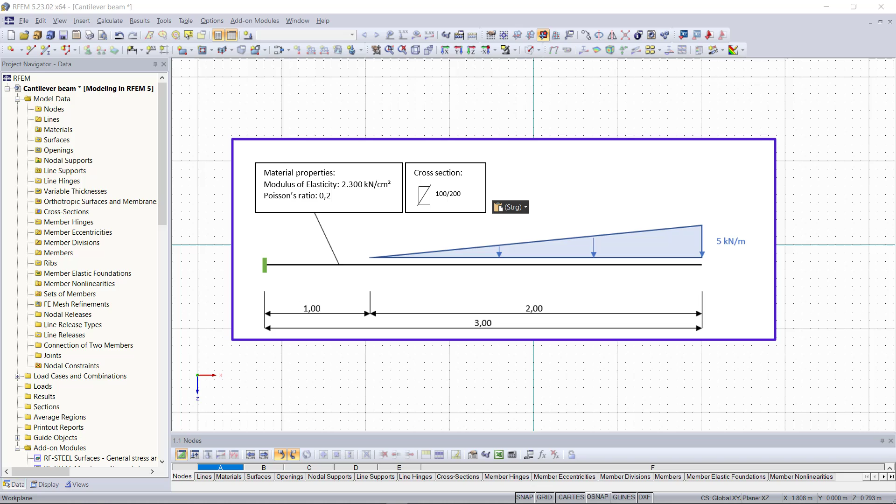Hi guys, and welcome back to our second part of modeling in RFEM. As previously announced in the first tutorial, we are going to create this cantilever beam, this time using the dialog options in RFEM for modeling.

To begin with, we can access all dialogues in the project navigator on the left side of the screen by right-clicking on the respective tabs or folders. Or we can access these dialogues using the insert menu up here as well. For instance, if we choose model data and select materials, you can see the option dialog box here. Within this tutorial, I am going to use mostly the project navigator for opening up these dialog boxes.

And again, we will start with the nodes of our beam element. For that, we go up here on the nodes folder, and with the right click, we choose the option new node. Then this new dialog appears, and just like in the first tutorial where we did use the tables for creating the nodes, we are going to enter the coordinates of our nodes depending on a reference node. This will be the origin, and we are going to place the first node here, so the coordinates of this node will be 0 and 0.

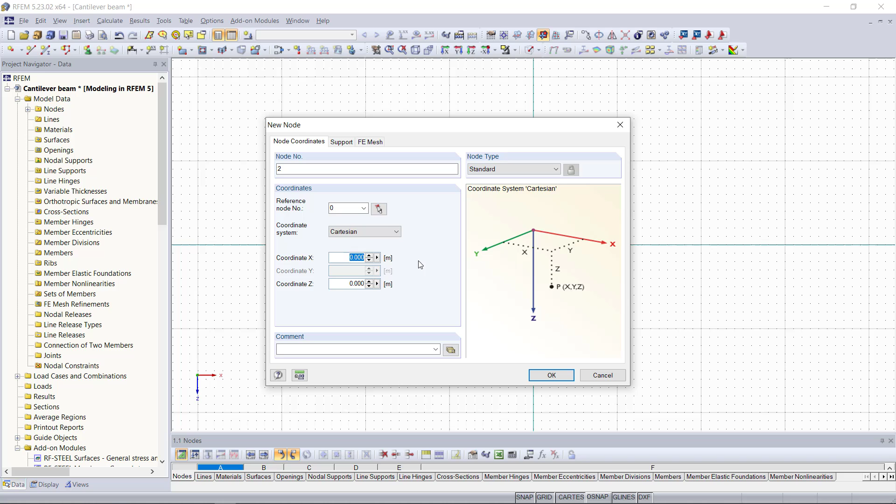Then we click OK, and we do exactly the same for the second node. Right click on the Nodes tab and choose New Node. The coordinates for the second node, we enter here 3, which defines the endpoint or the length of the beam. Again, we hit OK, and then we can see that the nodes are set in the graphical area.

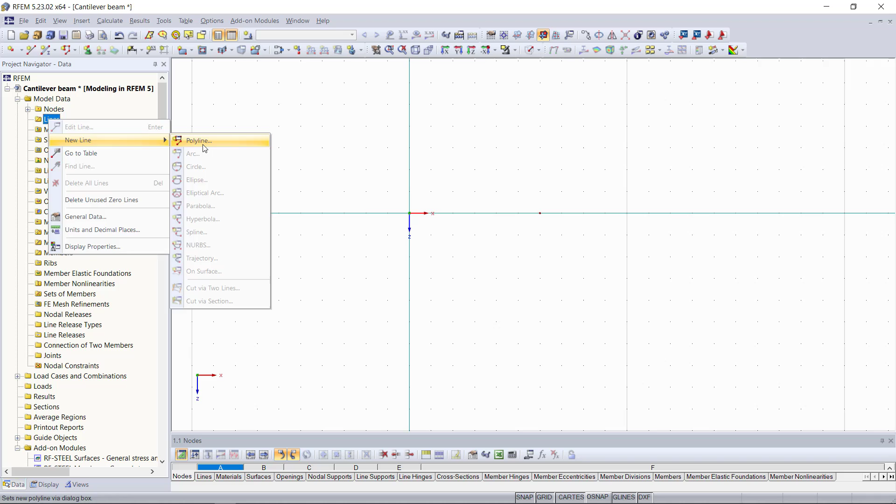So now to connect these nodes with the line in between, same procedure once again. With the right click on the Lines tab in the project navigator, we open the dialog box for a new polyline. At the top up here, we can define the number of the line. Since we just have one line, this will be the first one.

In the section below, we select the nodes to be connected, and we can either type in here 1, 2 for our 2 nodes, or if you have a more complex model and you don't know the numbers of the nodes, there is also the option to select the nodes graphically, if we click here on the cursor button and select the nodes out of the graphical area.

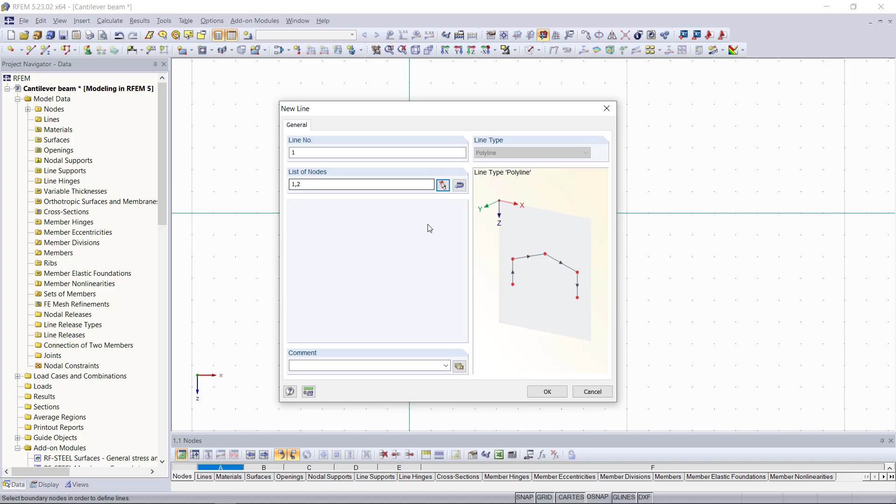Next, we will continue with defining a material. Let's say again, just as an example, we enter here material 1 like in the first tutorial. Then we will enter our characteristic values from that example. Again, you will notice that after entering the modulus of elasticity and a Poisson's ratio, the shear modulus is automatically determined. We can close this by clicking OK.

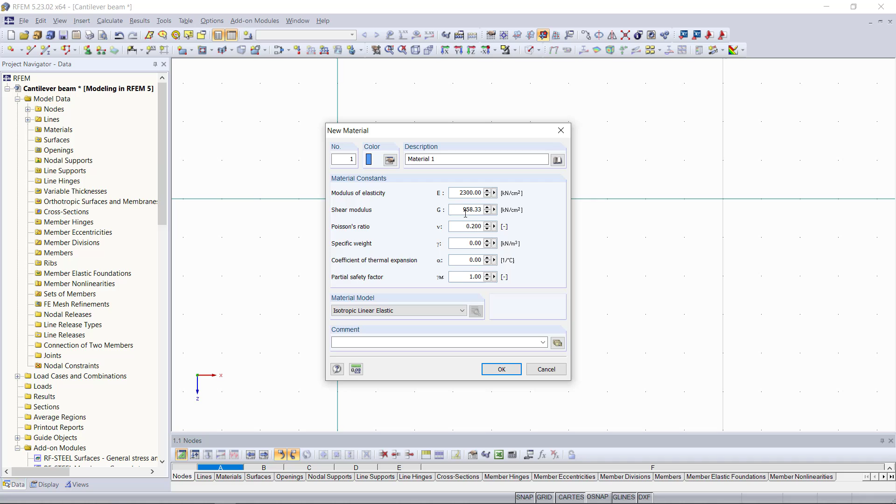Now we are going to set the supports, and once again we can find in the project navigator nodal supports, and with right click we will open the dialog for that. So a cantilever beam is one of the basic types of beam elements, and remember this type is characterized to be a statically determinate system. For that we need 3 support forces or reactions as a minimum.

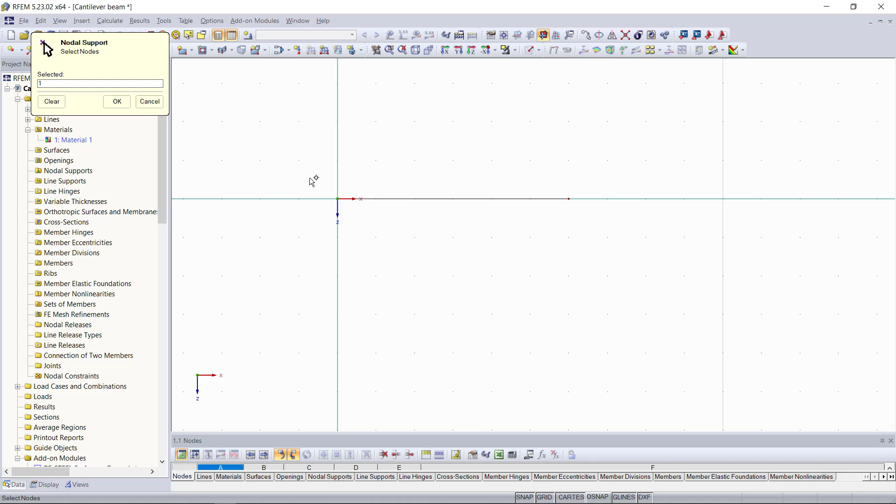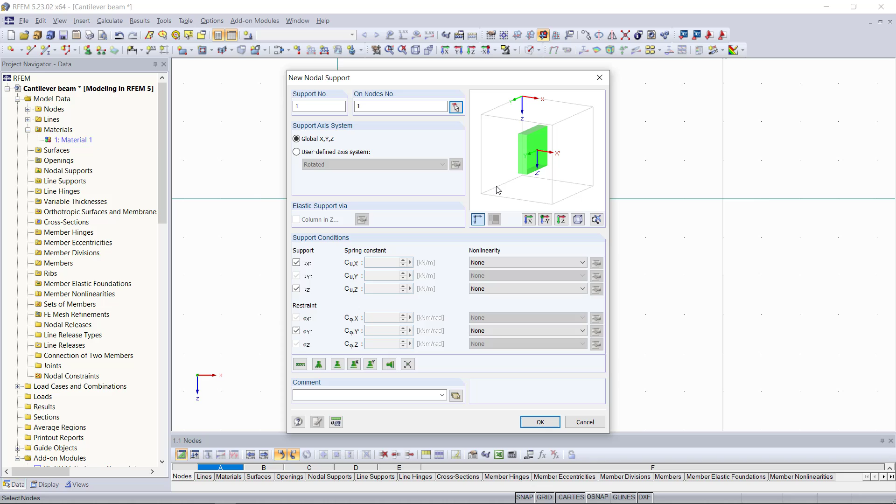Since this beam is supported at only one end, we have only one actual support here, which is going to be our first node, and at that support it has to have all of those reactions. For that, the support conditions here will restrain the beam horizontally and vertically. If we don't have anything else, it'll be allowed to rotate, and we don't want that, so we lock the rotation around the y-axis here. The graphic at the upper right corner gives you a nice visual illustration for that.

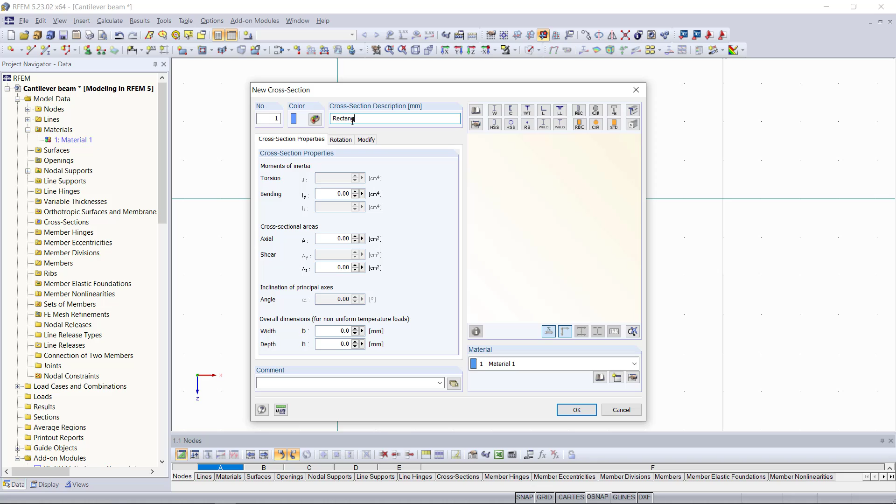Then we can click OK, and next we need a cross section for our beam element. In this dialog, we can either open up the library if we hit this symbol here, or we can just type in the cross section as well. Let's say we enter here rectangle, which will have a width of 100 and a height of 200, same as the one in our first tutorial. We can see below the cross-section properties, and down here we can choose the material for this cross-section, which will be our defined material 1.

Now that our cross-section is defined, you will notice that it's blue here in the project navigator. This is because it doesn't have a member to it yet. To assign it to a member, we can go to the members folder, and right-clicking on members, we select new member. Within this dialog, we can assign up here the member to a line. We can either type in here line 1, or once again we can assign the line graphically.

Next, within this drop-down option here, we can select the member type. For now, we are going to keep that as a beam. And below that, there is the option to rotate the cross-section as well. If we click, for instance, here, we can see this rotation here in the graphic on the right side. Moving on down here, we can assign the cross-section for this member, and we'll keep that for the member start and the end the same.

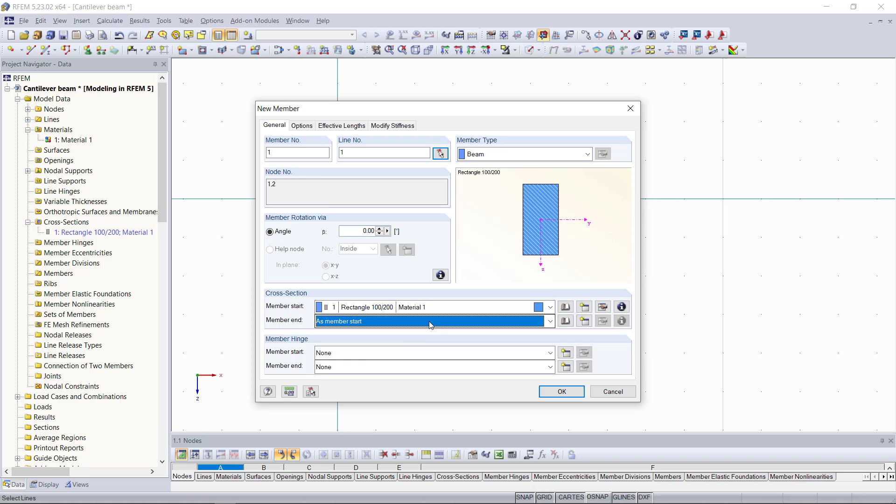We can also add member hinges, but we don't need that for this example. So we click OK, and if we turn off the wireframe model, you can see in the graphical area the cross-section has been rendered.

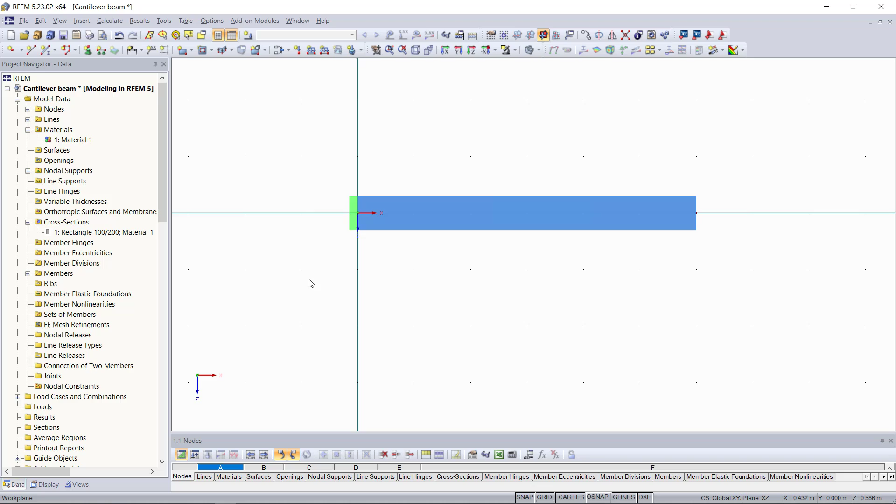Now that we have all model data that we need, we can move on to the load cases and the loads we'd like to apply. Remember, before assigning any loads, we'll have to define a load case. We can do this by going to the load cases and combinations folder in the project navigator. With the right click on the load cases, we choose new load case, and you can see in this dialog the program has already created our first load case.

Within this tutorial, we are going to have only one load case, so we can keep that and choose all loads here. Then we can deactivate self-weight because we don't want that to be taken into account for the results later.

Next, we will continue with the member load, and if we expand the loads tab in the project navigator, you will find for every load case that you have created a new folder. Since we just have one load case, we will expand this one here, and you can see here the options for different loads like nodal loads or surface loads and so on. We will choose a member load and open up the dialog for that.

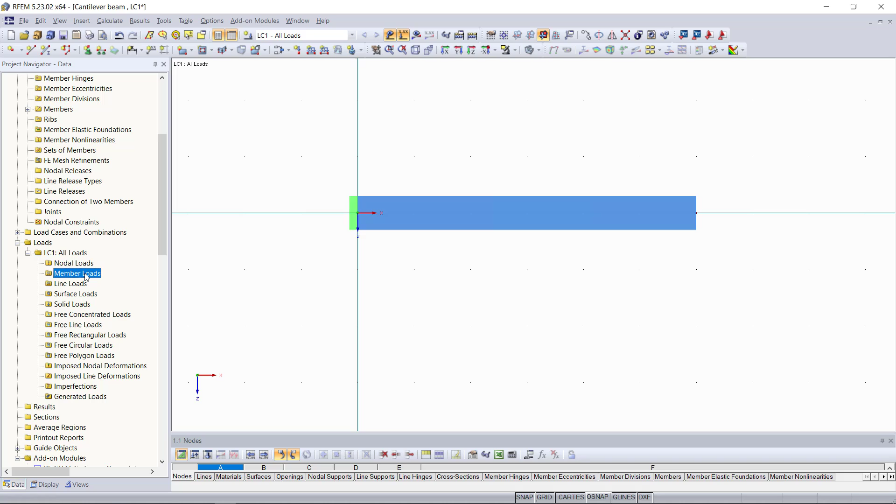The load type here, we're going to keep that as force, and for the load direction, we can keep that as the global member length in the Z direction. For this example, we are going to apply a triangular load, and for this we use a load distribution of trapezoidal. We can see up here on the right side how this load is applied on our member, starting with a load P1 and ending with a load P2. We can find these parameters down here in the section load parameters.

Since we want to have a triangular load distribution, we can keep P1 as 0, and we can enter here for P2 5 kilonewtons per meter. For this example as shown, we don't want the load to be applied over the entire member length. And to do this, down here there is this option; we can turn this off, and we can set where our load will be on the member.

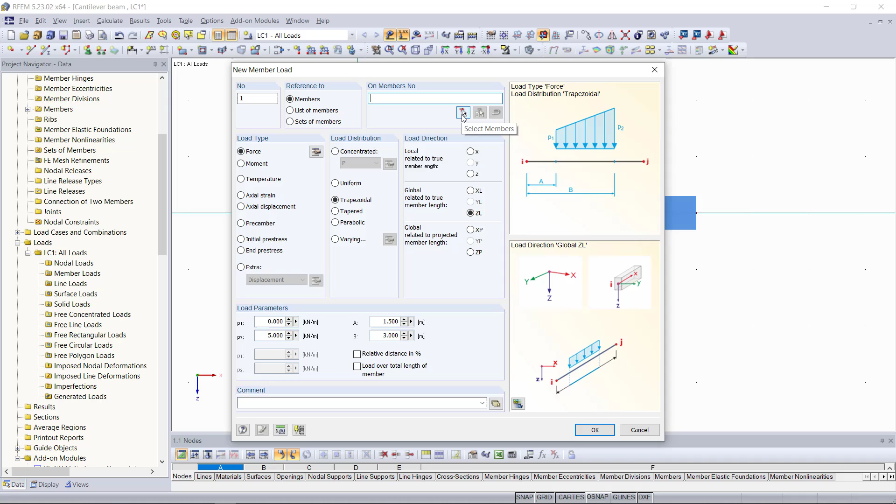So the start point will be point A. We can type in here 1.5, and end point B will be 3. Up here, we will then choose the member graphically, and we can click OK once again. Now the load is applied to our cantilever beam, as you can see in the graphical area.

To show the results for this load case, we'll go up to this button up here called Show Results, and then we click OK. Now you can see our results are displayed, and again our results tab has come up here where we can choose and display the deformations of this beam or the internal forces.

So guys, I hope this video was helpful to show you how to model using the dialog options in RFEM. In the next video, we will go over how to model graphically using the toolbar up here.